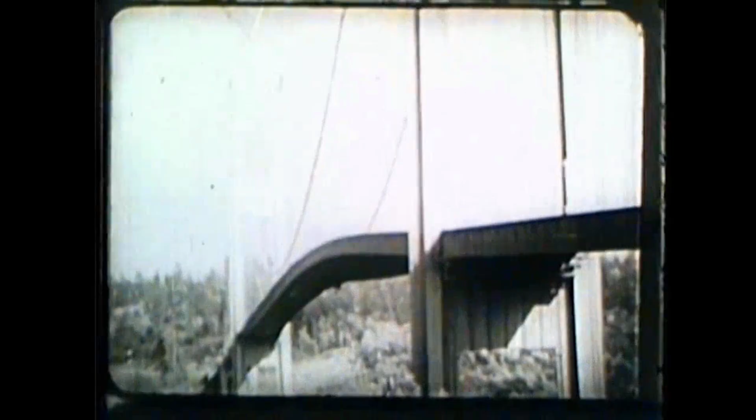July 1st, 1940, a record-breaking suspension bridge opens to fanfare, its slender steel span hailed as a marvel of modern engineering. Yet as soon as it rises over Puget Sound, Galloping Gertie begins to shudder and sway, not from accident, but from an invisible, misunderstood force. What did engineers miss about wind and motion that turned a symbol of progress into a global cautionary tale? The answer would transform engineering forever if you know where to look.

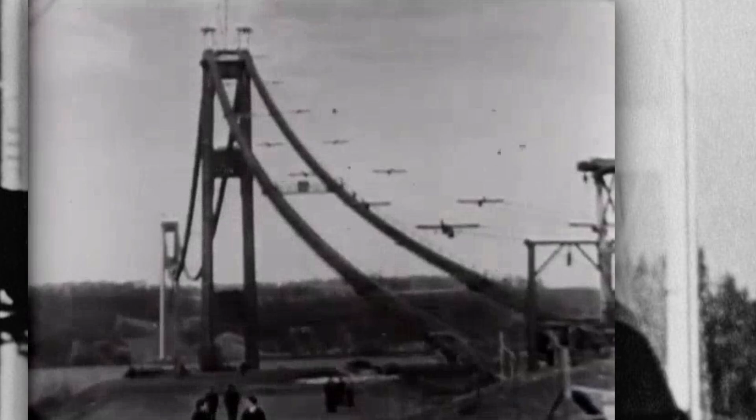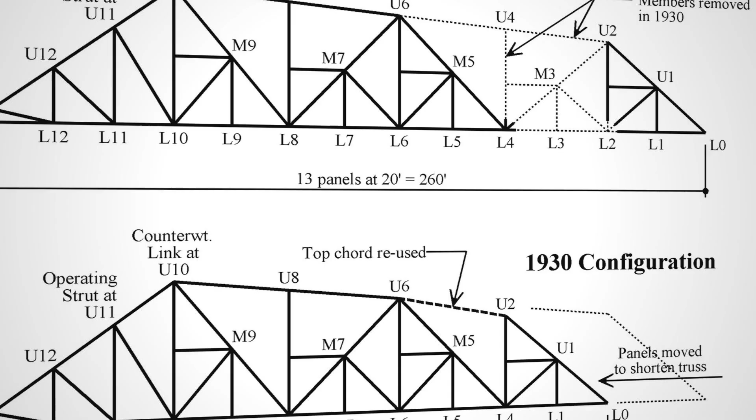From the moment construction began in 1938, the Tacoma Narrows Bridge was shaped as much by economic pressure as by engineering ambition. The state's chief engineer, Clark Eldridge, pushed for a conventional design with deep, open trusses, heavy, stiff, and proven safe. But federal funds were scarce in the shadow of the Great Depression, and the Public Works Administration demanded a lower price tag.

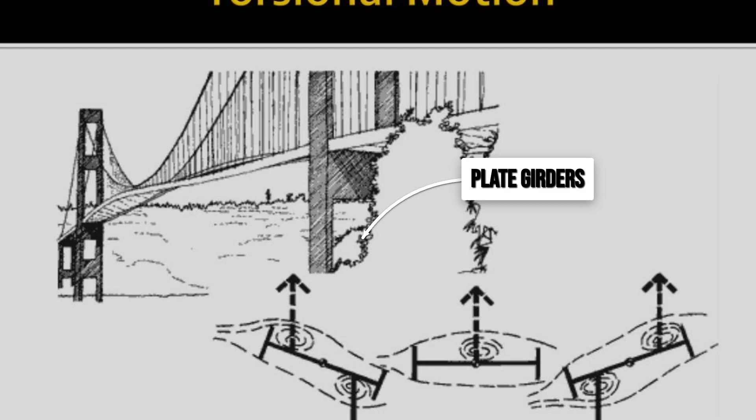Leon Moisseiff, celebrated for his work on the Golden Gate Bridge, offered a bold alternative, a slender deck supported by shallow, solid steel plate girders only 8 feet deep. This cut the projected cost nearly in half, down to $6.4 million, and won the contract. Eldridge's warnings about flexibility were quietly sidelined.

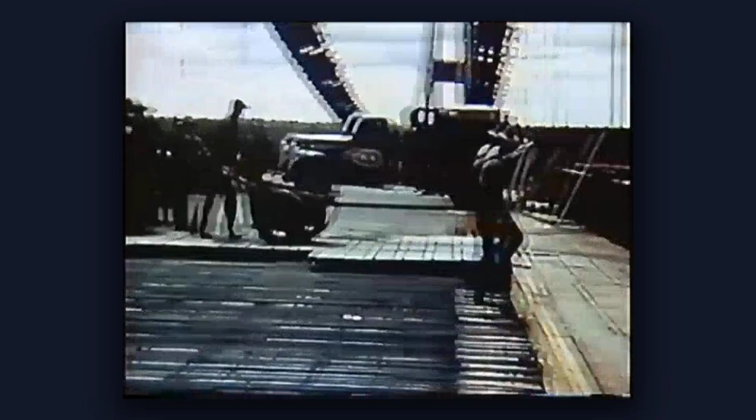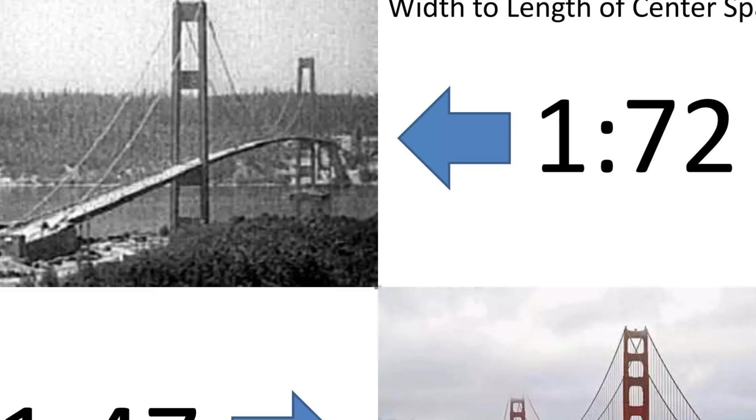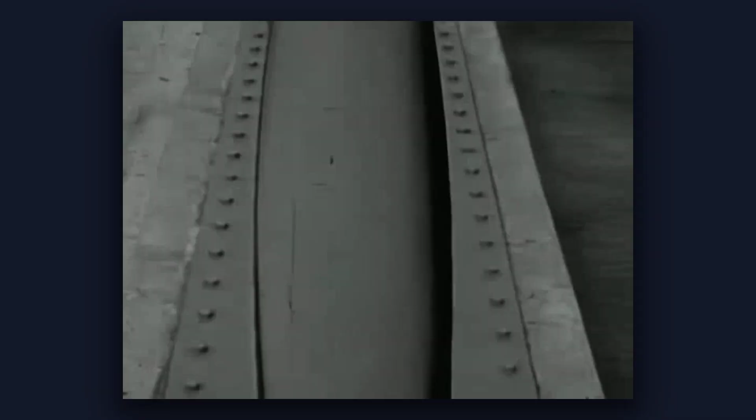As the bridge took shape over Puget Sound, its narrow 39-foot roadway and graceful lines drew admiration. On July 1st, 1940, crowds gathered for the grand opening. The press hailed it as a triumph of modern design, the third longest suspension span in the world. Yet even before the first toll was collected, workers and engineers noticed something off. In mild winds, the deck would undulate up and down like a ribbon, sometimes rising and falling several feet.

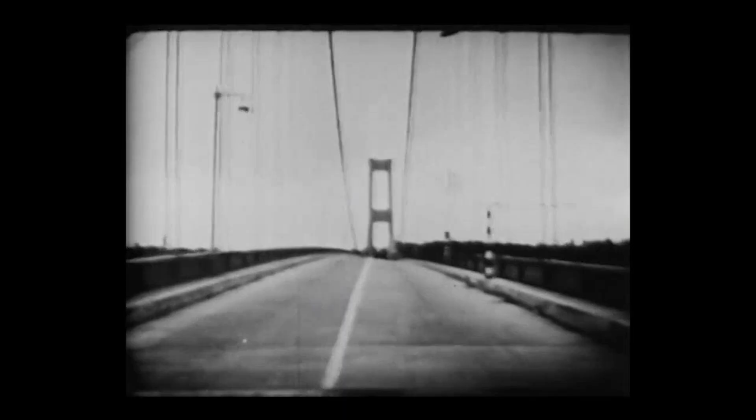University of Washington engineer F. Bert Farquharson later recalled that they knew, from the night the bridge opened, that something was wrong. Locals called the bridge Galloping Gertie almost immediately. Drivers reported feeling their cars bounce as they crossed. School children begged for rides, eager for the thrill. Newspapers ran stories on the bridge's peculiar motion, and home movies captured the swaying deck. Some found it amusing, others unsettling.

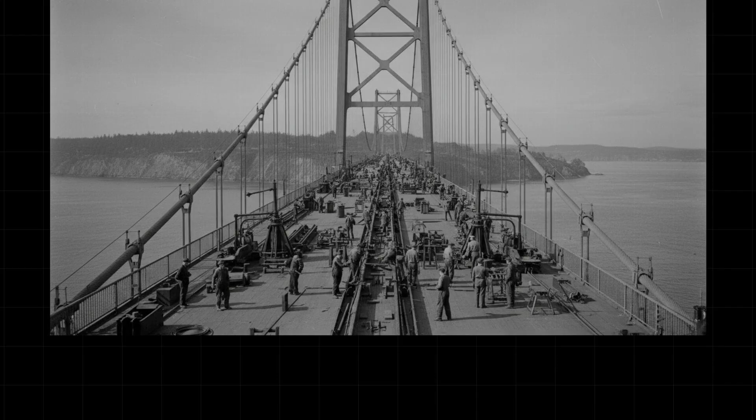Attempts to solve the problem began quickly. Hydraulic jacks were installed as makeshift shock absorbers, but they failed to calm the movement. Later, engineers added tie-down cables to anchor the ends. On November 1st, 1940, a snapped cable showed even these fixes could not keep the center span steady.

The spectacle of a bridge in constant motion drew national attention, but behind the fascination, a deeper uncertainty grew. Why did a structure built by leading experts, using the latest theories and federal oversight, move so much in ordinary winds? The answer, hidden in the interaction between air and steel, would prove far more elusive and dangerous than anyone had guessed.

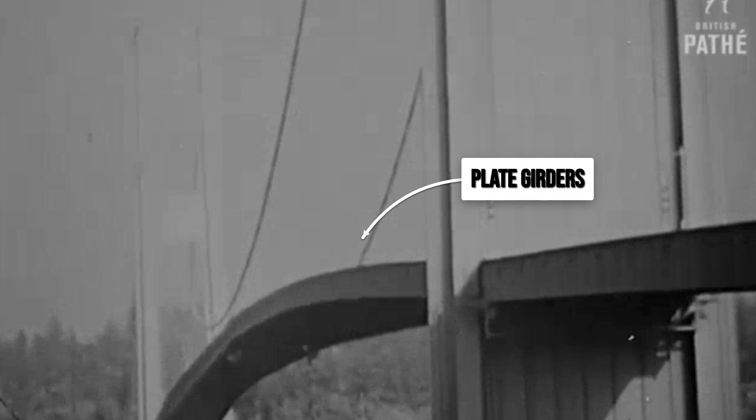Wind on most bridges is a background force, steady, predictable, and accounted for in calculations. On the Tacoma Narrows Bridge, it became an active participant. The deck's unusual motion was not caused by resonance alone. Instead, the bridge fell victim to a more complex, and at the time poorly understood phenomenon known as flutter.

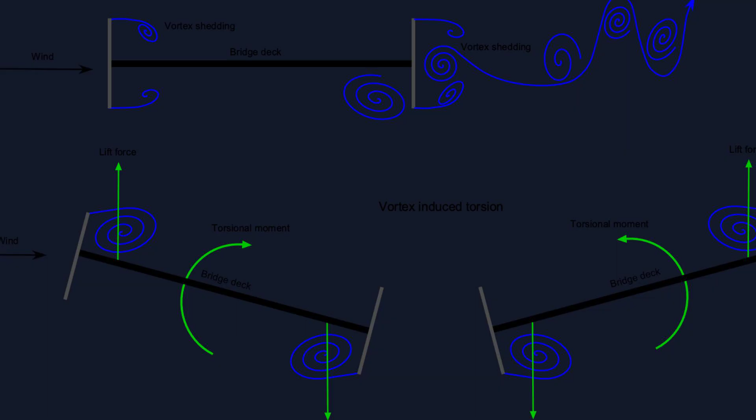Resonance occurs when an external force, like wind gusts or rhythmic loads, matches a structure's natural frequency. The effect is familiar: a child pumping their legs on a swing, or soldiers breaking step to avoid setting up dangerous vibrations. Engineers in the 1930s believed that as long as a bridge's natural frequencies stayed clear of common wind patterns, the structure would be safe. But the Tacoma Narrows Bridge revealed a deeper vulnerability.

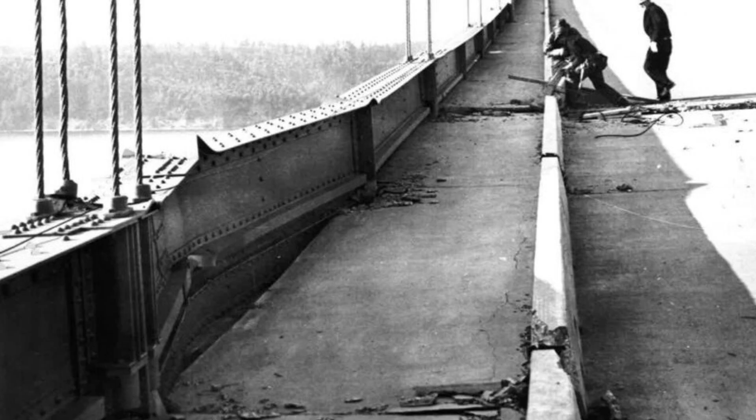Aerodynamic flutter is self-excited. The bridge's own movement changed the way air flowed around it. As the shallow solid plate girders, just 8 feet deep, cut through the wind, air could not pass freely above and below the deck. Instead, flow separated and swirling vortices tugged at the structure. Each twist or dip of the deck altered pressure, feeding more energy back into the motion. The result was negative damping. Rather than dying out, each oscillation grew stronger, even in steady wind.

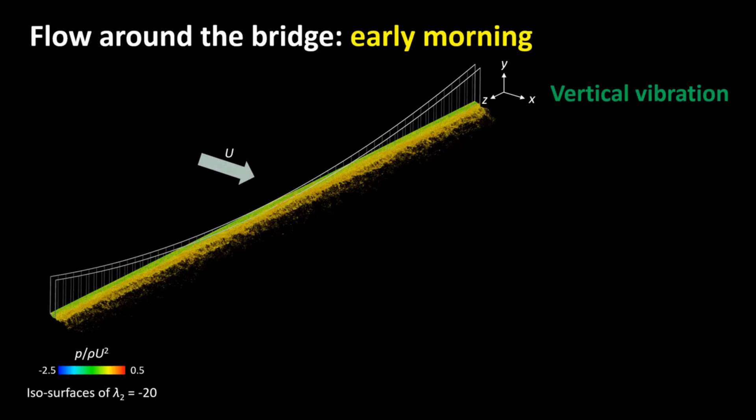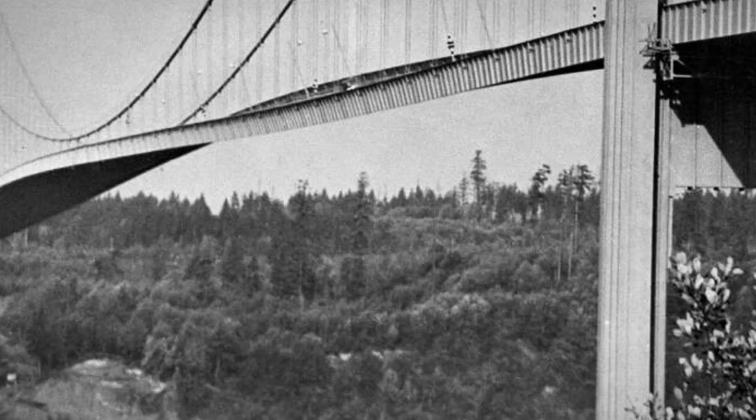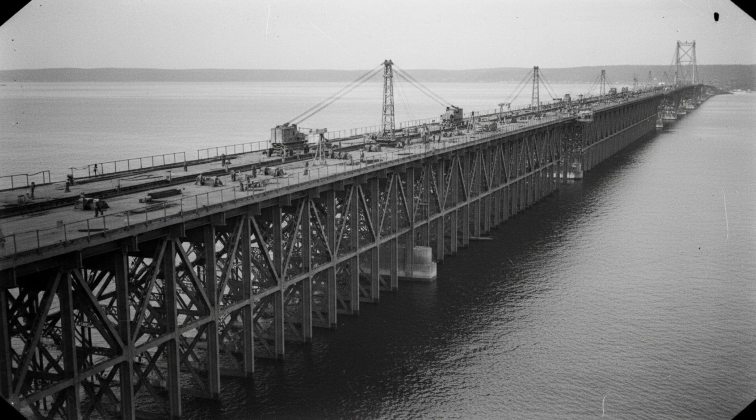This was not a matter of wind pushing in time with the bridge's rhythm. Above a certain threshold, around 35 miles per hour, the bridge's own flexing and twisting began to shape the very forces acting upon it. The H-girder geometry, chosen for cost and aesthetics, made the deck especially vulnerable. Its narrow width and shallow depth left it with little resistance to twisting. The solid girders, unlike open trusses, trapped wind and encouraged flow separation, making the deck prone to sudden and unpredictable shifts.

No wind tunnel tests had been run on a full-scale model before construction. The science of aeroelasticity was still in its infancy. Engineers relied on static calculations and experience, unaware that the bridge's geometry had crossed a critical point where air and steel could interact in ways that defied expectation. The bridge became a feedback machine, each movement drawing in more energy from the wind until even minor gusts could set the entire span in motion.

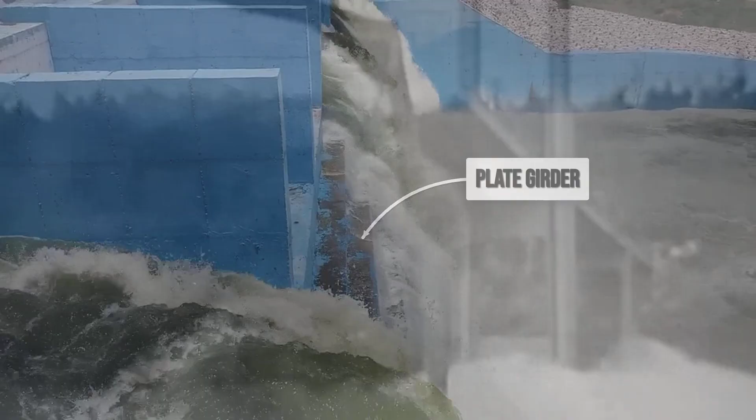The difference between resonance and flutter is subtle but profound. Resonance needs a push at the right tempo. Flutter needs only motion and wind. It feeds on itself, unchecked, until the structure can no longer absorb the energy. For the Tacoma Narrows Bridge, this invisible force was embedded in its very shape, waiting for the right conditions to reveal itself. The lessons from these unseen forces would soon become impossible to ignore.

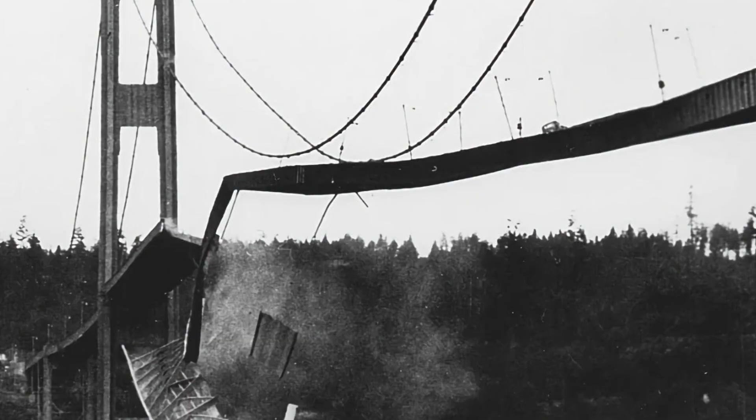At sunrise on November 7, 1940, a steady wind swept across the Tacoma Narrows, clocked at just over 40 miles per hour. The bridge's deck began its familiar, uneasy oscillation. First a gentle undulation, then sharper, more erratic waves. For 3 hours, the main span flexed up and down in a slow, relentless rhythm. By mid-morning, the vertical motion shifted.

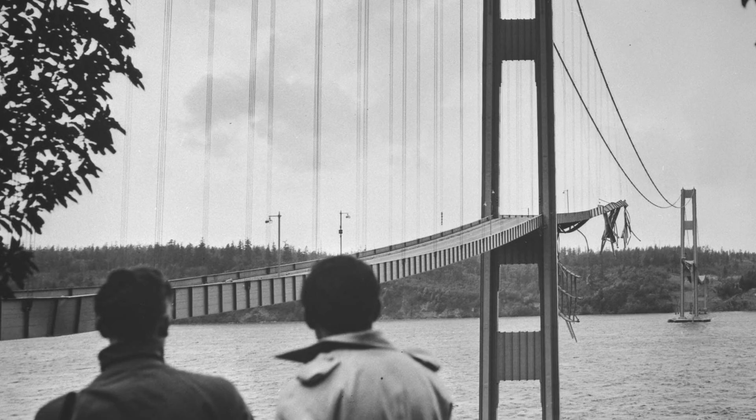A loud snap echoed across the water as a mid-span hanger cable slipped loose. The balance was lost. The deck started to twist, one side rising as the other fell, swinging back and forth at a rate of 14 times per minute. On the bridge, Leonard Coatsworth's car shuddered violently. He tried to drive forward but lost control. Forced to abandon his vehicle, he crawled along the buckling roadway, leaving behind his Cocker Spaniel Tubby trapped inside.

Nearby, photographer Barney Elliott set up his camera, capturing the deck's contortions as the wind funneled beneath and above the steel plates, feeding the motion instead of calming it. Professor F. Bert Farquharson watched from the shore, notebook in hand, as the bridge's movement grew wilder with each cycle. By 11 in the morning, the twisting reached its peak. The deck heaved nearly 28 feet from side to side.

Suspender cables snapped in succession. Without warning, a 600-foot section of the center span tore free and plunged nearly 200 feet into the water below. The towers lurched inward, steel groaning under forces never anticipated. In just moments, the bridge that had stretched confidently across the Narrows was gone, leaving only swirling debris and stunned silence in its place.

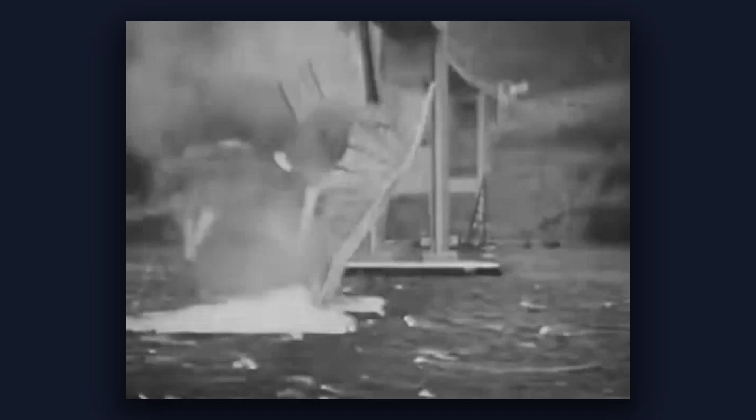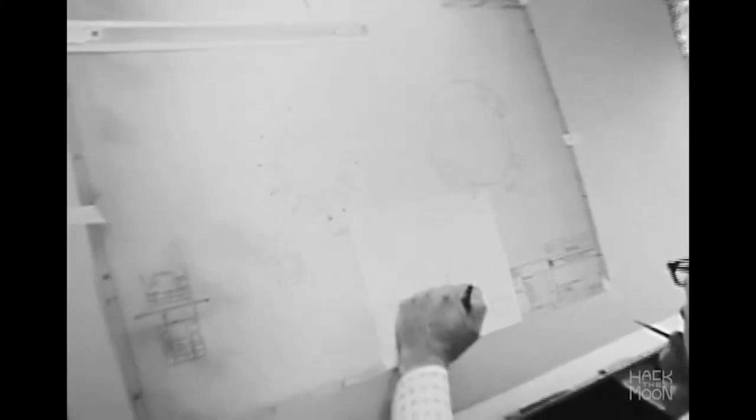In the aftermath of the collapse, the Federal Works Agency appointed a panel of experts to uncover what had truly brought down the Tacoma Narrows Bridge. Among them was Theodore von Karman, one of the world's leading authorities on aerodynamics. The commission's investigation concluded that the bridge had failed not from resonance, as many believed, but from a phenomenon known as torsional flutter, a self-exciting instability where wind and structure feed energy into growing oscillations.

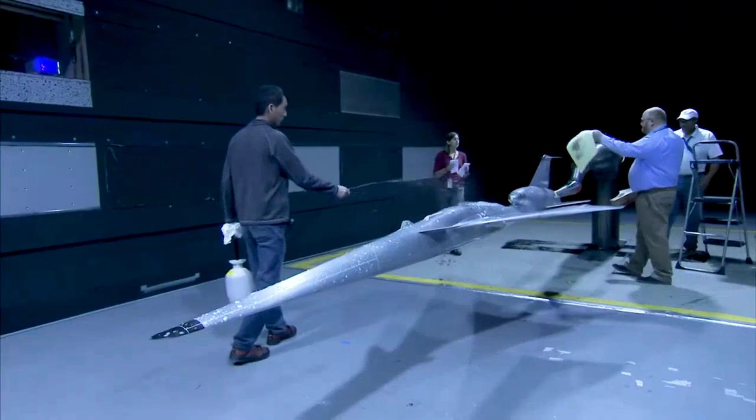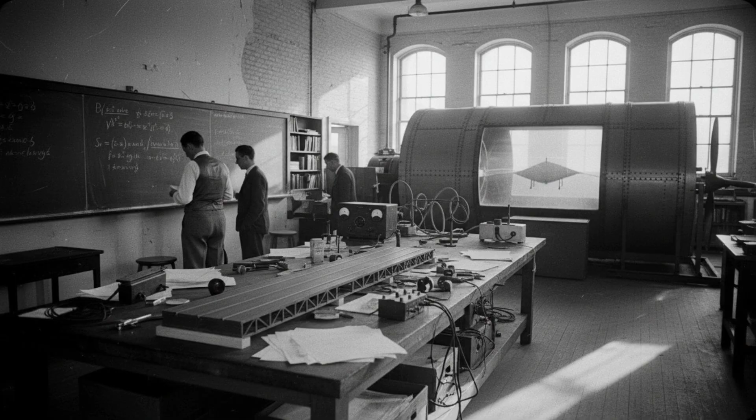This insight was more than an academic finding. It exposed a blind spot in the way engineers everywhere thought about large-span bridges. Wind tunnel testing, once considered optional, quickly became a standard requirement for suspension bridge design. Researchers at universities and government labs began building scale models to study how air moved over and around different deck shapes. The Commission's report was distributed to engineering societies across the United States and Europe, prompting revisions to design codes.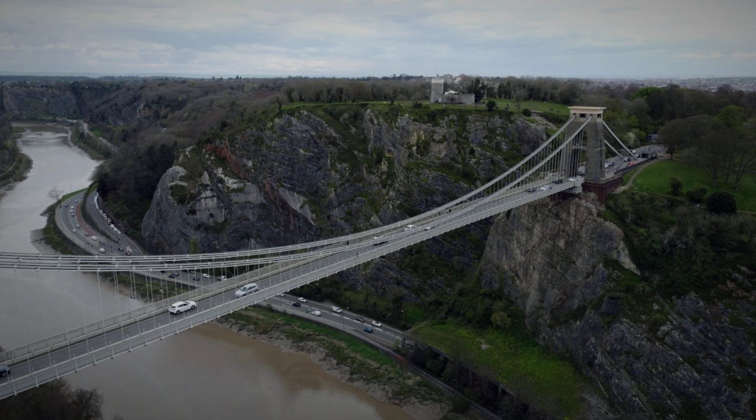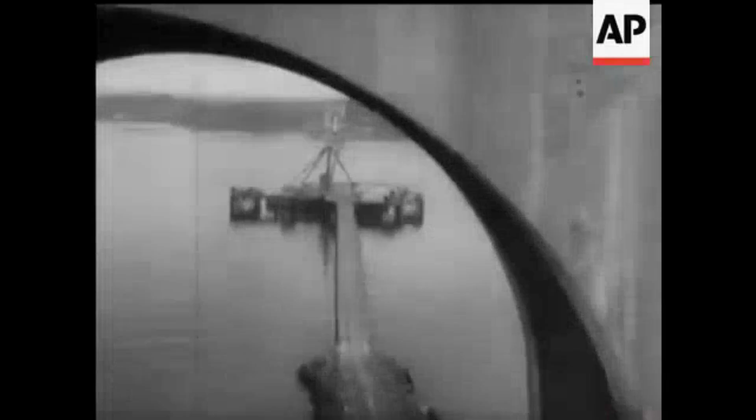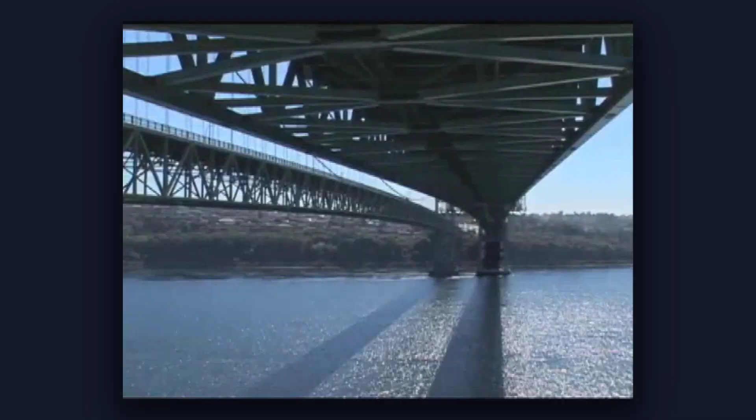The American Association of State Highway Officials integrated aerodynamic stability checks and damping requirements into its specifications. In the United Kingdom and Canada, similar reforms followed, with wind effects gaining new prominence in bridge planning. Tacoma's replacement, completed in 1950, reflected these lessons. Engineers chose an open truss design, allowing wind to pass through the deck rather than around it. The new bridge was tested in wind tunnels before construction began, a practice now considered essential.

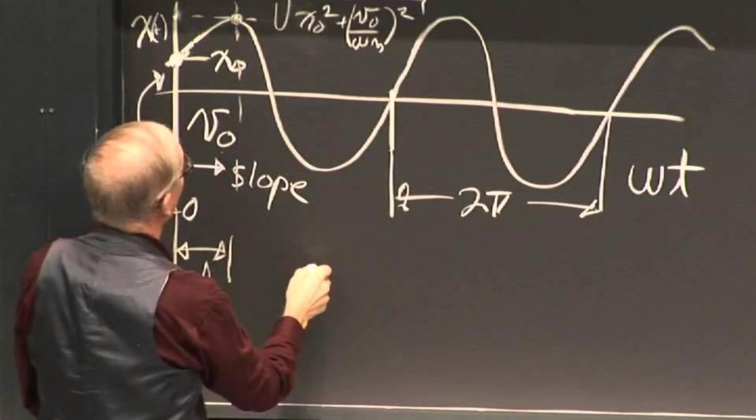Engineering schools added the Tacoma Narrows collapse to their core curricula, using it to teach the difference between resonance and flutter, and the importance of dynamic analysis. Decades later, the story remains a touchstone for students and professionals alike. The failure of Galloping Gertie transformed a single disaster into a foundation for safer, more resilient bridges worldwide.

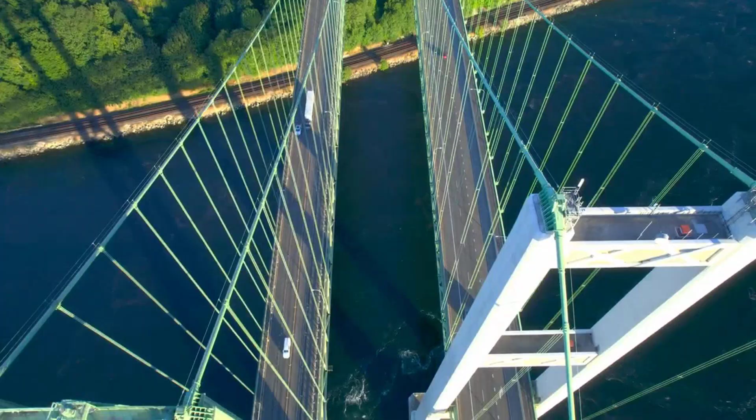Every major bridge built today faces wind tunnel tests because of what happened here. As our infrastructure grows taller and lighter, invisible forces remain a silent threat. The real danger is not what we see, but what we think we know. Failure keeps progress honest.